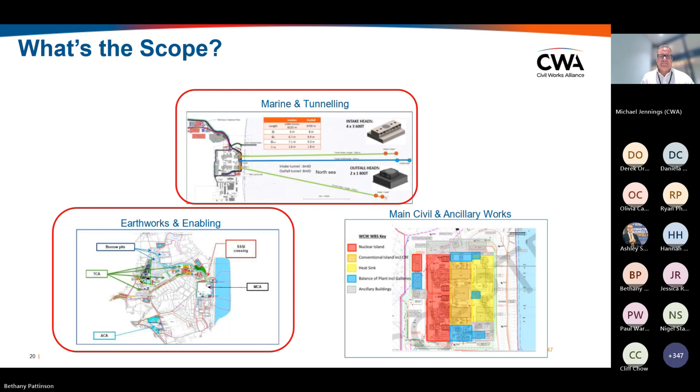Repeating what David said, I think the shafts for those tunnels - and Derek will go into more detail - are due to start towards the end of 2027. Okay, I will hand over to Derek now, and I look forward to Q&A at the end of the session. Thanks, everyone.

Thanks, Mike. Good morning, everybody. As you can see, my name's Derek Orr. I'm the pre-construction director for Marine and Tunnels, Enabling Works and Earthworks. I don't quite know where to follow after Mike, because he's done quite a lot of the work for me this morning.

As Dave Spate probably said at the beginning, the project is transitioning at the moment towards delivery. Dave mentioned some milestones and costs we're moving towards in the programme. To achieve this, there are already some contractors in place. That doesn't mean opportunities aren't there at the lower level - in the first part of this presentation we want to look at where we are, what's appointed, and the opportunities at lower level if you contact some of the contractors there.

For support in the works they're doing. So I'll do a brief run-through of the works to date in the ground improvements and the SSSI crossing, and then move on to the future works coming up, both for the enabling and earthworks and also the marine and tunnels, which will have a big expansion over the next 12 months.

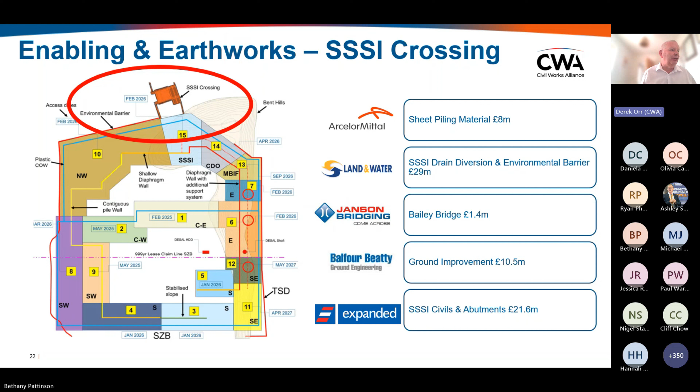The second one, if we go to the next slide, is the ground improvements, and this is really a recent start.

There's early geotech works taking place, deep soil mixing, with elements of what that will require for cement powders and the preparation. This is the preparation for the plastic wall that we're going to be putting in, that Mick mentioned in his part of the discussion.

As I say, it's roughly, for all intents and purposes, a 500 by 500 plastic wall with a central spine wall in the midst of it, also 500 metres long, roughly 50 metres deep. So you can imagine the amount of support these teams will need to complete the works.

For deep soil mixing, cutter soil mixing, and ultimately the plastic wall, this work has just started now, with a major milestone hit in July, and will continue through to the back end of 2026, linking into the commencement of Unit 1 in 2026, Unit 2 in 2027. That, with the dewatering, then facilitates the major earthworks, which we'll come to in a little while. So, major plant coming to site, major deliveries taking place over the period, but there's still more to come, as we talked about before.

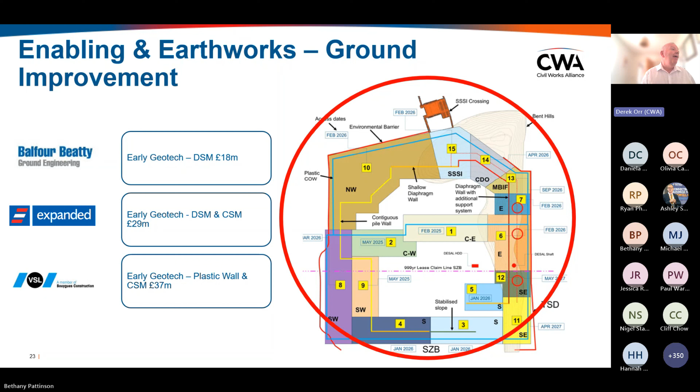The next slide, with the temporary sea defence, is really placed and is underway now. We've got two particular parts of the temporary sea defence, and you'll see in this picture, in the middle of the layout of the slide, there's a 999-year lease line, and everything to the north of that's actually placed. The sheet piling is going in at the moment, and is going well.

However, there is a second half of that, which is the temporary sea defence to the south, which will involve rock armour, probably taking place somewhere between February 2026 to August 2026, depending on safety case approval. This is the work that liaises with Sizewell B, so the works have not been placed at this particular time. The design's probably going to complete in the next few weeks and few months, and then we're going into a period of tendering and then delivery against these.

For the rock armour protection as a follow-on activity, the exciting thing is we're still developing the solution. The rock armour is probably 3 to 6 tonne in weight, and we'll need special placement. It could be that we go for an option, depending on the supply chain and the engagement we have with them, of using precast concrete elements rather than just rock itself. So there's lots of opportunities over the next year with respect to the temporary sea defence south, as we affectionately call it, but it's a work in progress.

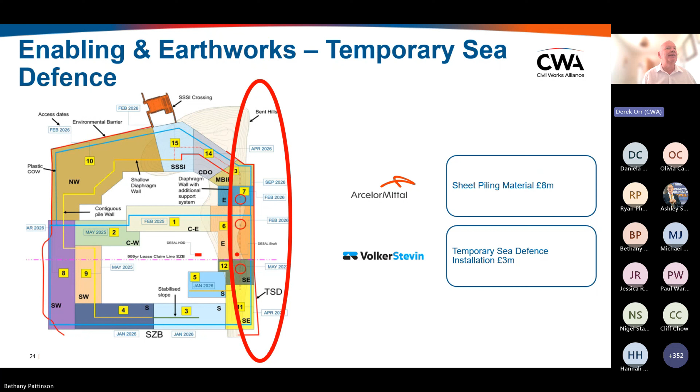The design is nearing its completion state, ready to move to the next stage. So, next slide. Now we get into elements of work that's starting to move forward, but it's not fully placed with the tier ones, and that's the MBIF, the construction drainage outfall, and also the desal and marine works.

There is a requirement for this site to have a desalination plant, and also install a construction drainage outfall, and also construct a marine bulk import facility. I'll cover these kind of separately.

For the construction drainage outfall and the desal, a contract's already been placed with Volker for the horizontal directional drilling. There's lots of support activities taking place for getting the site ready. There's some shaft construction as well that's just about to start at this precise time.

Offshore work activities, some dredging activities, and also a very specialist pipe that's going to come from Norway. It's a single extruded UPVC pipe that needs to be formulated together to then pull back, to give the relative smoothness required for the construction drains itself.

A lot of these works have been placed, but there is still support activities required. For example, we're just about at the point right now of taking over the hub office in Lowestoft, with some support actually required there to provide support for the offshore works for the desal and the pipe pullback.

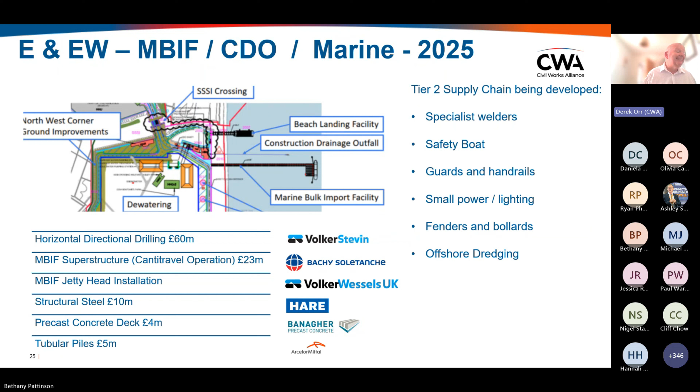Moving to the next slide, there's the beach landing facility. While it's on the same slide as the marine bulk import facility, I'll just cover that the MBIF will have to be removed at the end - so while it might be around until about 2032, 2033, it's actually a temporary structure that will be removed at the end of the project.

The beach landing facility will be the permanent structure that remains throughout the lifetime of the project. It's roughly a 200-metre long jetty, supporting the import of heavy loads required for the site, both during construction and during any maintenance or follow-on activities needed throughout the potentially 120 years the facility will be in operation and decommissioning.

The design will be completed around January 2026, and following that we'll go into a tender process. Because of its length, it's not really viable to use a canti-traveller system, so a different type of system will be required to support that.

In addition, there'll be some UXO works required, just to double check to make sure there's no UXOs where we want to put piles, and also some dredging activities, some offshore areas for a cradle to beach the vessels. That work's going to take place late 2026 and be available again by May 2027 to allow the works and deliveries to take place there.

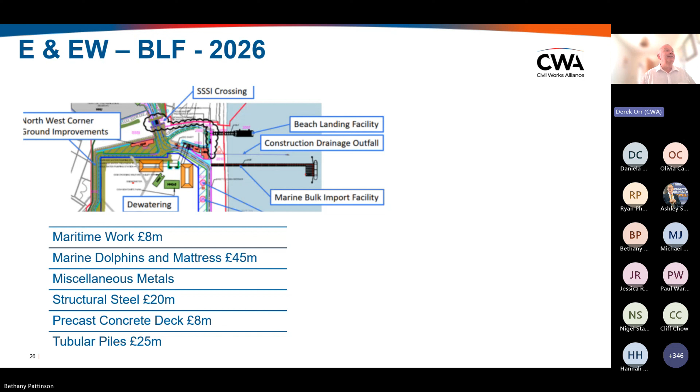Okay, so that's a brief run through enabling works and earthworks. I'll jump on to the next slide where we're going to marine and tunnels.

And it's funny, as we do talk about marine and tunnels slightly differently, there's a lot which, for me, I call marine and tunnels, really the blood supply to the site. Without the water actually going through the whole of the system, basically you don't have a facility.

You've already got an idea there's 3 tunnels that's actually going to take place there. But above and beyond that, if we move to the next slide, we'll just take you through some of the elements that we've already went through with respect to that and what the scope is.

And it's been said before, there's basically 3 3-kilometre tunnels. You will notice that there's an on-site construction area, so the early civil works associated with that and to support the activities is going to be 2027 into 2028. The tunnel itself is probably late '29 at the moment, but we need to have the whole thing set up as well. Supporting that, there'll be off-site fabrications, for example the TBM, and there's also what's taking place in the MCA to store segments, but more on that later.

I would say it's as near to replication as we possibly can to HPC. We've got 3 tunnels: an outfall tunnel, single outfall tunnel that discharges the material once it's been through the system, and 2 intake tunnels. As Mick has said, the intakes are about 6 metres, the outfall about 8 metres, just slightly larger. Above and beyond that, we've got 4 intake heads and 2 outfall heads, and we've also got some deep shafts, some liners, and some off-site work activities. So it just gives you a flavour.

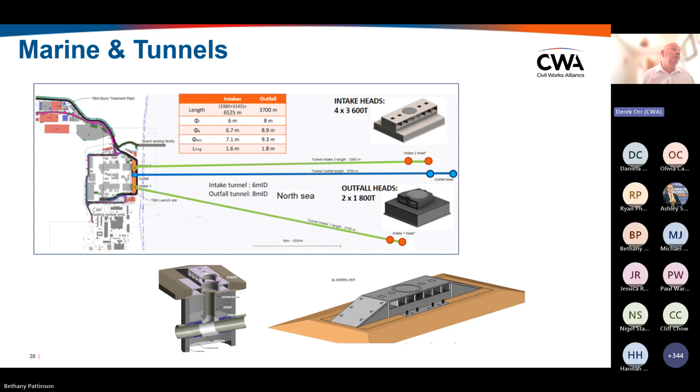One of the things that's been focused on at the moment is that we've got works taking place in the MCA and the oral offices in Ipswich. This is going to be a wider impact, and it starts in the next month. So the Avonmouth heads and tunnel segments will be manufactured in the existing facility that was created for HPC in Avonmouth.

The advantage that gives us is that the site's already set up. There's a precast factory there, which has been used for High Speed 2 as well, and we'll transition that into one which is specific for Sizewell C. You'll also note in the picture on the left-hand side, you can see the heads getting constructed there as well. And that's the case.

It's going to be the case that we will do the same here. You may have noticed, or you'll see in the next slide, that there are also ramps. Part of the area where you see the accommodation block in the top left-hand corner of the picture will actually be used for the construction of the ramps, and I'll come to that in a little while.

We have a phased handover with respect to the site. So the first part of the site getting handed over is the precast factory, an area which is to the right of the accommodation block, and also a segment storage area. And we will take over that roughly Q3 2025, in effect as the 1st of September.

We'll start to develop the early civil works, and we'll cover a bit of that in a couple of slides' time. Later on in Q4 2026, we then take over the heads and ramps area once HPC are finished with them. That actually allows a complete transition between HPC and the works taking place at Sizewell C, and we've got a nice timeline for that transition.

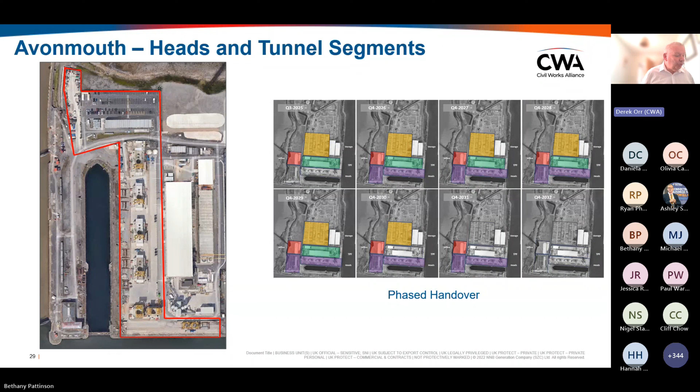So if we go to the next slide, that's an opportunity that's there now. The work that's actually going to take place there is, of course, the tunnel segments. We're building a team for success at the moment, and that's not just the CWA, it's not just suppliers who've been there before - we're at the point now of mobilising to start the tunnel segment works round about late 2027. In doing that, we need to develop up the concrete plants, and we'll come to those in a second.

These works on the right hand side are nothing to do with HPC, but it gives you an idea of what the facility will look like in the areas where we require storage areas, shown on the left-hand side.

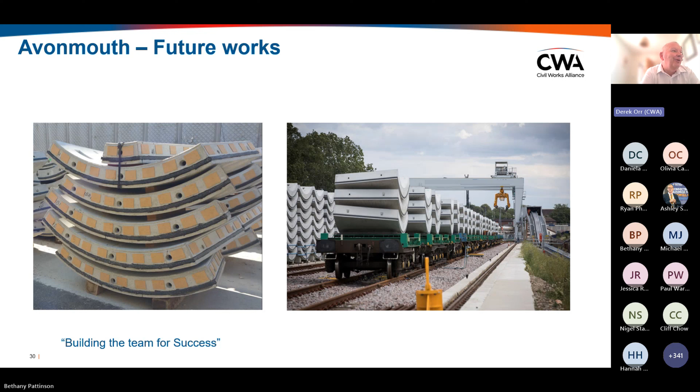So if we go to the next slide, we'll get into a bit of detail. The proposed layout we're talking about is works that will start when we get planning permission, round about Q4 this year. There'll be site set-up contracts, so we'll get UXO investigation, GI works, and some piling works. There's also office welfare and accommodation.

As you can see, only some of the works have actually been tendered this time. So there's a real opportunity, if not just if you extend to the East Coast, but also if your works extend to the West Coast, to be involved in some of this work or the specialist areas you want to be involved with. We'll be putting these on the site such that there's opportunities for everybody to be involved in some of these works.

You'll see there's a marine procurement strategy in there, and that's an interesting one because we've been engaging with different parties with respect to how we actually deliver, for example, the heads to the site. How do we get them close to the site, how do we actually put them in, and what's the optimum strategy from there? We'll be covering that at later times as well, because there are rather big procurements that need to take place, involving a huge amount of offshore vessels and fabrications.

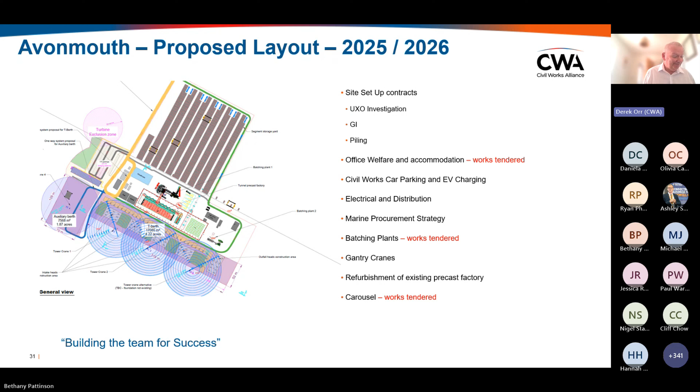So what do the marine intake heads look like? Mick has covered quite a bit of this, but I'll give you some detail of the works, which covers into the marine works as well. We'll get 4 large intake heads, constructed in Avonmouth, transported round on a just-in-time basis to the main site.

Above and beyond the heads, there are 8 ramps needed. We're talking about still probably in the region of 2,000 tonnes weight that needs to be there. It's about 3,600 tonnes for the intake heads, probably about 2,000 for the ramps themselves. All of these need to be lifted into position.

They also have miscellaneous fabrications associated with them, so there's lifting lugs, which we're moving to put into compete for at this precise moment, and start the works associated with these. These are super duplex, requiring specialist welding, and would be delivered to site just in time to allow them to be cast in position.

There's also miscellaneous items in super duplex, which we affectionately call jewellery, just because they're not as big as the main elements, but they're there to support elements like the head positioning. Some of the locking positions all need to be super duplex to make sure they last the full lifetime of the project, such that they can be removed at the end.

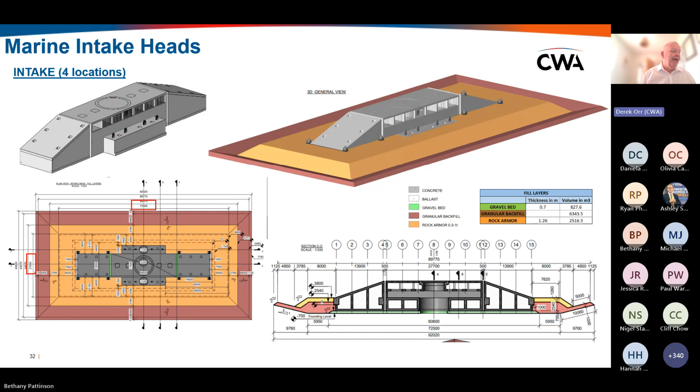The outfall in the next slide is slightly smaller. You can see that it's a mirror image at the moment of HPC. So where the heads at Sizewell C are slightly different in orientation for the intakes, the outfalls are just the same, and roughly those are discharging large volumes of water that's been through the system.

It will have the same type of methodology. There'll be dredging, all constructed at Avonmouth. It will have the granular backfill to support the heads in placement, then the sinking of the heads, replacing the locking stone in position, then the rock armour.

You get an idea with some of the volumes that's there. Again, these will be done in the same timeline.

So the idea we actually have is that the marine works will come first. The UXO works will be starting next year, such that we get a clearance certificate to allow dredging works to commence 27-28, and then the placement of the heads in 28, and then the shaft liners, which this time will be in first, rather than HPC, where they were after the placement of the tunnels. It's a non-line connection that's taking place, but it's very similar to the works at HPC in principle.

Differences being it's a non-line connection, so we then drive the head into position, place a liner above it, and then the tunnel works feed to the alignment of the heads, such that we can then position them with greater accuracy.

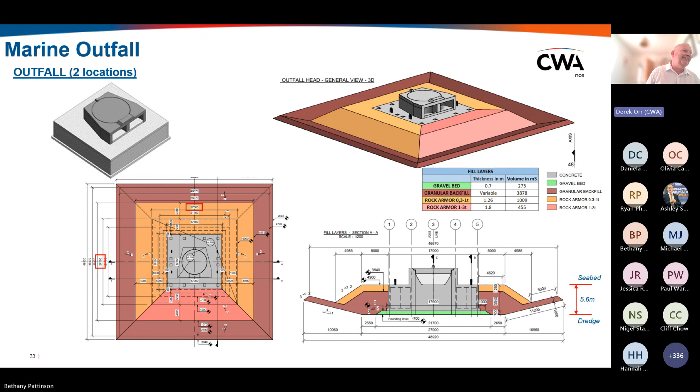So roughly the quantities involved, if we go to the next slide, is we've got a dredging volume somewhere in the region of 127 to 198,000. The reason it changes is we've also got a moving seabed, so we're working between best and worst cases and where we are.

We've now got no secant piles - that's now been removed in favour of concrete for the tremie fill, so some of this has been updated. There is annular grout, which is to hold the casings in position, such that when we drive it - we've talked about the intake heads, the ramps, the casings. Now the casings are quite interesting because we drive the casings into position to form an excavated layer, so we can put the intake heads in, so we can put the liners in position.

The liners are the most important element, because they form the link between the tunneling operations and the North Sea. There's an awful lot of work that goes into creating those liners, which are class 1 nuclear, the highest grading for traceability and quality required. For non-nuclear comparison, imagine the highest bridge standards, then go even higher - that's where class 1 nuclear takes you. Traceability is absolutely key at every step throughout the whole process.

There's about 40,000 cubic metres of backfill and 15,500 of rock armour. I'll take an action to update that slide, because we're now going for a deep tunnel option, which means the casings are now about twice the length as we were at Hinkley - overall about 30-40 metres deep, where water depth is about 16 metres. So you're talking about casings roughly 60 metres long, and liners about 30 metres long on average. That gives you a flavour of the works taking place there.

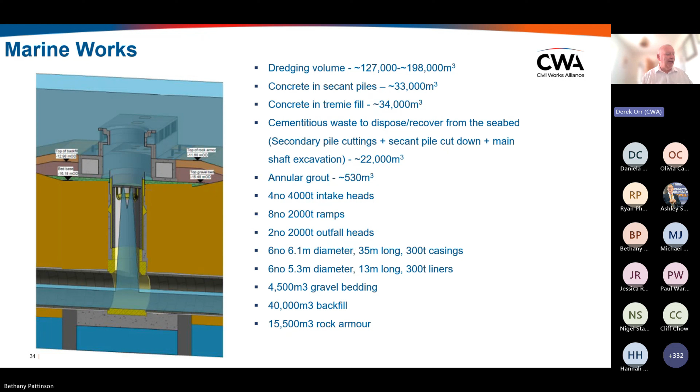That will start to take place in 2027, so it gives you a flavour of what's coming up with the main works. You can see the head being transported by barge - it might not be by barge this time because we have to take the head round Land's End. It might be a combination of vessels and barge, and we're working out the optimum route with respect to those locations. So that gives you a whistle-stop tour of the works in marine and tunnels, and also enabling works in earthworks. For the next discussion, we'll probably take you into earthworks in the TSD South and give you an update on the marine and tunnels.

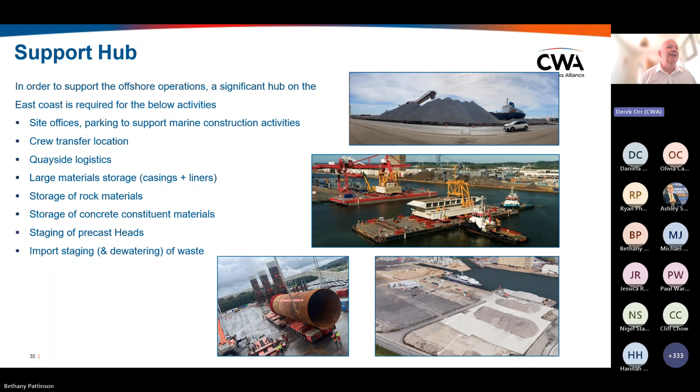So I'll hand you back now for the next part of the presentation.

Thank you, Derek. Good morning, everyone. I'm Daniela Rodriguez, the Procurement System and Process Lead for CWA. Hope you are enjoying this webinar. So far you have learned more in detail on what CWA is, as well as the engineering associated with this project. Now we will go through the details regarding the process that will be supporting the procurement process, as well as the systems for the CWA.

If we can go to the next slide, please. So first point, CWA will have their own systems. At the moment, we are working on the transitioning from the Sizewell C systems to the CWA systems. For the purpose of this webinar, we'll be focusing on the systems involved, starting from the expression of interest, the EOI, to the tendering process, since those are the ones related to the supply chain. As you can see on the screen, some of them will remain unchanged - Sizewell C and CWA will be using the same ones - while others will change.

So if we can go to the next slide to see this point more in detail. Thank you. Starting with expression of interest, EOI - at the moment, you have been seeing different opportunities for the project to compete for. We'll still be using the same system, the same platform, to post different opportunities for this project. In terms of pre-qualification, at the moment we have been using a system called Ivalua to manage this process. CWA will be aligned with the UK Common Assessment Standard, and for this will be supported by Constructionline.